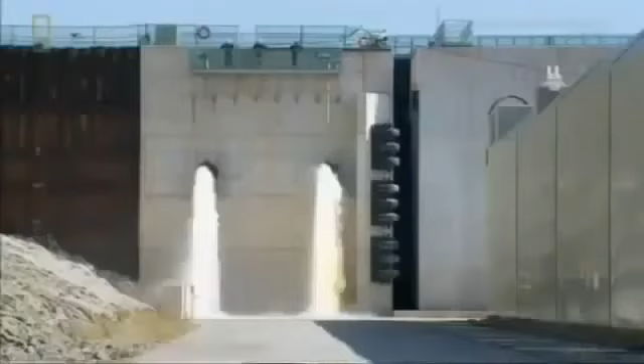Your next vacation may be spent in a paradise you've never heard of. You'll just need a way to get there. Here's the catch: that way has to go underwater. It would become the deepest immersed highway on Earth. Oh, they also have to build a couple of bridges. And did we mention the typhoons?

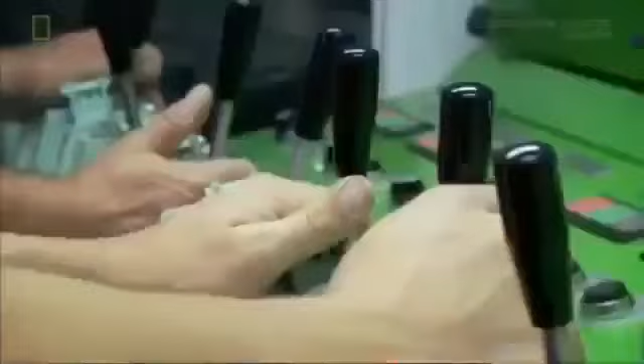These tugs are towing a contradiction: a tunnel segment that's both colossal and fragile. Come back, close. Slow down. A raft of techno breakthroughs and untested results.

Bound for a place few know, to entice the world to visit, and even sway the choice for the Olympic Games.

Busan is South Korea's second largest city, with 4.2 million people. Bigger than Madrid, closing in on Milan, and as hectic as Manhattan. South Korea is an Asian tiger, and Busan makes it roar.

Its skyline will soon include one of the world's tallest buildings. It's the nation's biggest port, and the 5th busiest in the world. Every 3 seconds, they unload a container. It's so busy, they had to build the sprawling Busan New Port. And still, Busan grows.

Busan is such a comer, it's bidding for the 2020 Summer Olympics.

But Busan has one big problem, and it's on display here at one of Asia's biggest fish markets. Dozens of vendors cram in here, 14 hours a day, every day of the year. And that's the trouble with Busan: it's so crowded, it's running out of room.

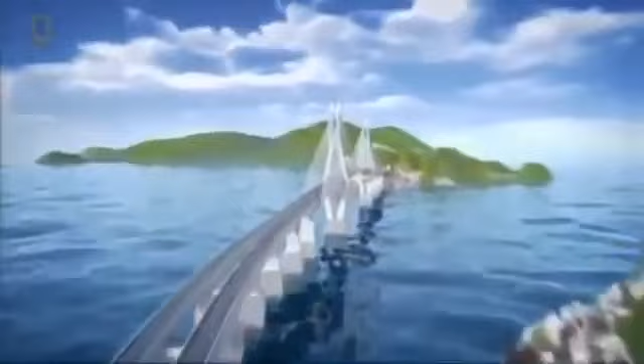The solution will slash travel time from nearly half a workday to 40 minutes and revolutionize life on both sides of the bay: the Busan-Geoje Fixed Link, a 4-lane highway that runs nearly 50 meters beneath the sea. Then it leaps across 2 colossal cable-stayed bridges, altogether longer than 80 football pitches — one of the biggest infrastructure projects in the world.

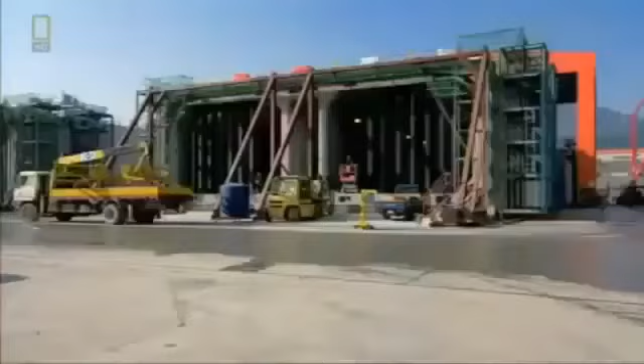Plunging 48 meters below sea level, the link will boast the deepest immersed roadway in the world. The tunnel will be composed of 18 mammoth segments, each as long as 2 football pitches and as heavy as an aircraft carrier, wide enough to carry 2 lanes of traffic each way, with an access tunnel between.

That's the concrete reality. Now, here's where it gets dicey. Each segment has to be carefully towed into position, then carefully sunk to the seabed. And all the segments have to align within 35 millimeters, less than a thumb's width.

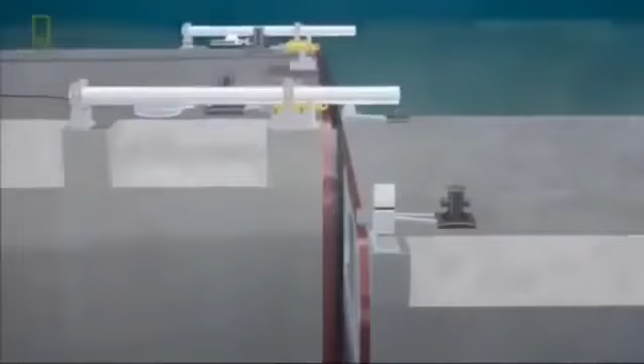Weather adds its own demands. This site is exposed to the open sea. There are always high waves, and the water is deep as well. It is wide open to the Northwest Pacific Ocean, so we have extreme exposure conditions for the construction period. So we've got to be ready for whatever that sends us, like big swell waves, strong winds, and even occasional typhoons.

Building a tunnel like none ever seen will take techniques like none ever tried. Yet the Koreans have never built an immersed tunnel. But this country has.

The Dutch have 5 centuries of experience at holding back the sea.

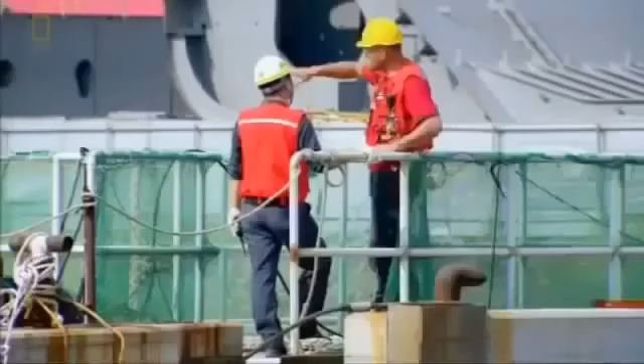21 years ago, Peter van Westendorp joined Strukton at the bottom and worked his way up. He's worked on 8 underwater tunnels.

There's just nothing better than immersing a tunnel. It's great to work with a relatively small group of people who are so focused on their job and put in 200%. That's just amazing.

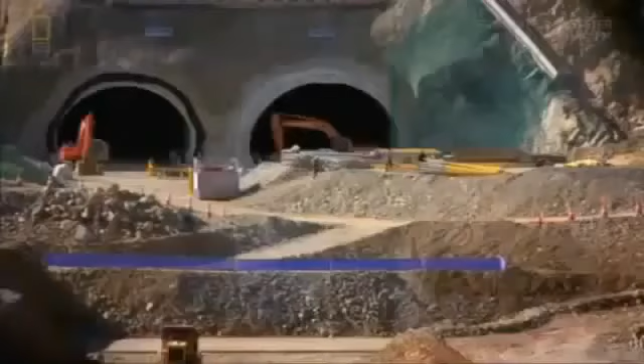Construction begins with the tunnel entrances, one on Gadeok Island, the other near an uninhabited island. From here, engineers will dig down to 12 meters below sea level to meet up with the undersea tunnel segments. But they won't tunnel through the seabed itself. If they did, the gradient would be too steep for driving. Instead, Peter's crew will lay prefabricated tunnel segments on the seabed.

First, engineers dredge a trench where the tunnel will rest. To buttress the foundation, they bore concrete columns into the seabed, stopping 3 meters shy of bedrock. The reason? Earthquakes. Avoiding bedrock will give the tunnel crucial flexibility. The segments will rest on a bed of gravel to ensure an even surface.

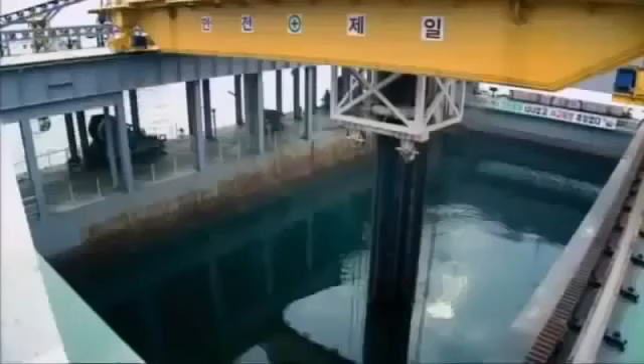Because the bed determines the exact height of each tunnel segment, the gravel must be placed with pinpoint accuracy. Later, the entire tunnel will be covered with thousands of tons of crushed rocks to protect it from collisions with ships or anchors.

Because the tunnel segments will be prefabricated, the first challenge is finding land for a construction yard. Not an easy task in Busan. If you look around, there's not a single metre of flat land anywhere that a contractor can use as a base for the construction period. From the tunnel site, the closest spot lies 35 kilometres away. It's big enough to build up to 5 tunnel segments at a time.

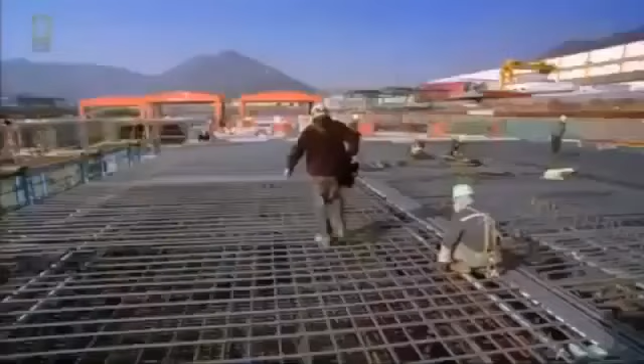Each segment weighs about 48,000 tonnes and is made of 8 subsections, each twice as long as a London bus.

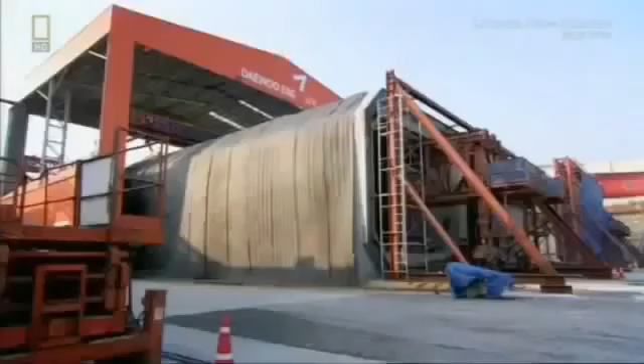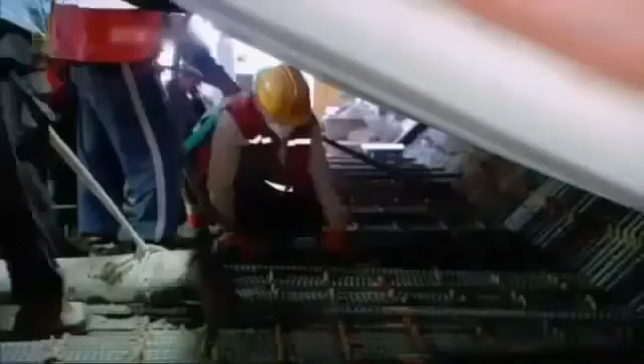Anyone with a basement knows water can penetrate concrete joints, potentially disastrous in an underwater tunnel. But each giant section is cast without a single joint, thanks to Korean ingenuity. We continuously poured full sections from the ground up to the top of the walls to eliminate gaps in the walls. A process lasting 24 hours.

After casting, the ends are sealed with steel bulkheads, a Dutch innovation best appreciated later on the bottom of Jinhae Bay. The bulkheads are watertight because these babies are about to take a bath.

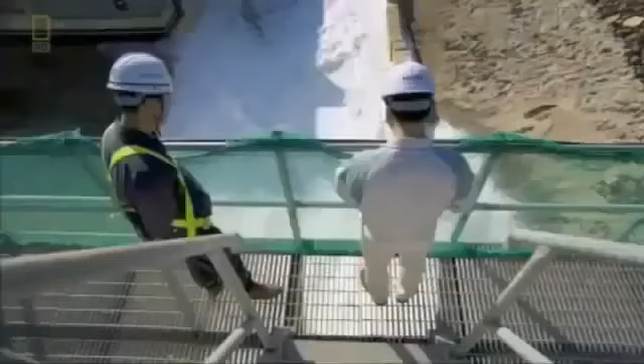Flooding the dry dock will allow them to float the segments out to sea. The inundation of the dock takes approximately 48 hours.

During the first phase, we let in water until it reaches the level of the bulkhead door. Then we'll check to see if the bulkheads are leaking. Once all the leaks are repaired, or if there are no leaks, we'll fill up the dock completely.

It's enough water to fill 230 Olympic pools.

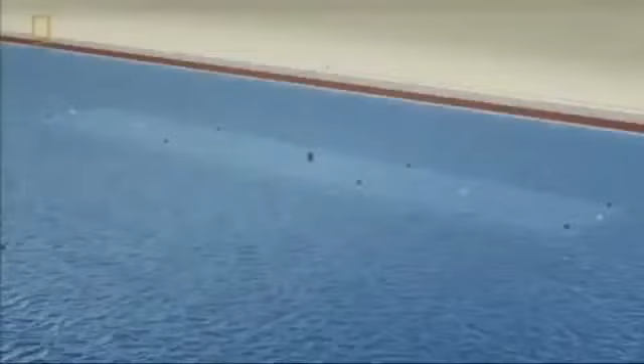So how do you prep 48,000 tons of dead weight to float? Inside every tunnel segment, there are 6 ballast tanks, and they're filled with water.

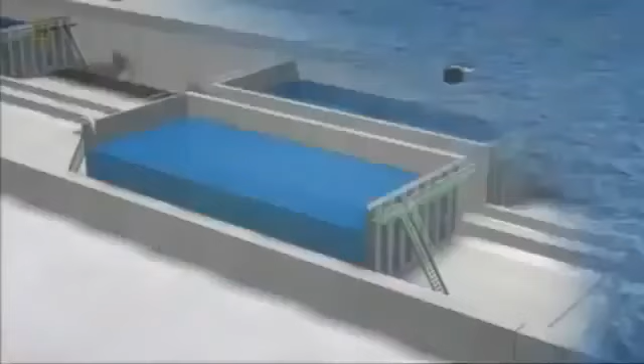To start the flotation process, we begin pumping out the water. We continue until the tunnel segment starts floating.

So what the tugboat has to do is to tow that slow. Then with the other winches at the backside, we control the tunnel element sideways direction. Now they can begin to warp out the segment.

Removing the first segment takes brawn and finesse to avoid colliding with the dry dock.

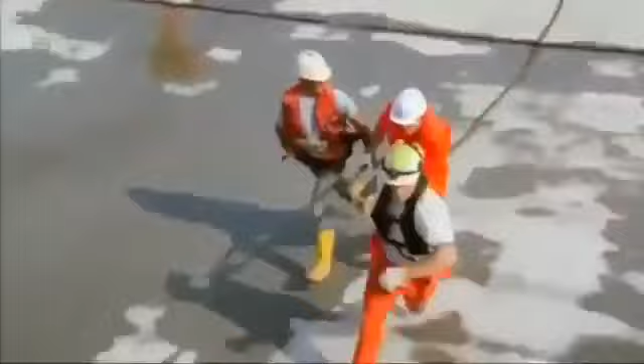With barely 2 meters on each side, there's no room for error.

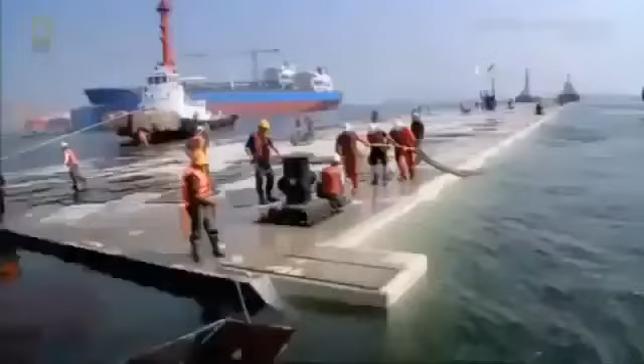While work continues on the undersea tunnel, the rest of the Busan-Geoje fixed link starts to rise: 2 giant bridges, one with 3 pylons, the other with 2.

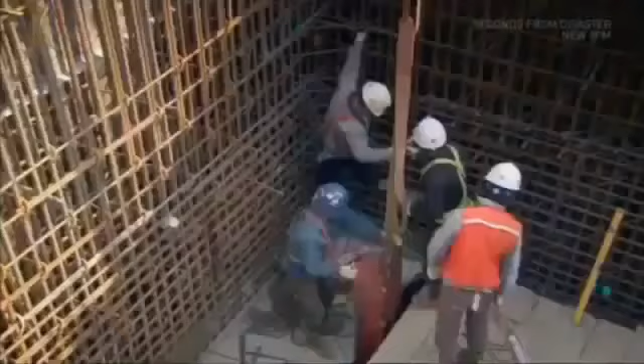At its topmost, the 2-pylon bridge will soar 156 meters above sea level, the height of a 50-story building. The span between the pylons will stretch the length of 5 football pitches, with enough room for the tallest freighters to pass under. Crucial for a city that thrives on shipping for its livelihood.

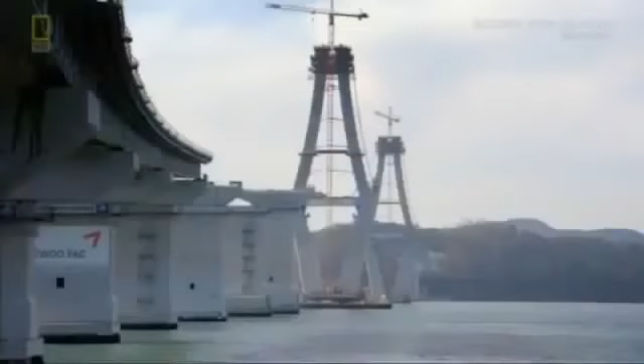The most pleasing aspect of the bridge is also the most daunting: its curved diamond shape. Of course, curved pylons are very difficult to construct, but they're very much in harmony with the surrounding scenery, in that they bear resemblance to a mother's praying hands and to the wings of seagulls.

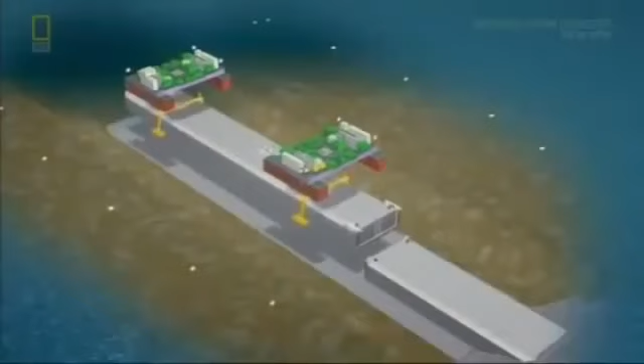35 kilometers away, the first 5 tunnel segments arrive at a temporary mooring site. From here, they'll travel across Jinhae Bay to their resting place on the sea floor, already leveled and lined with gravel. And here's how they'll get there: pontoons the size of a mansion, Dutch designed, Korean made. One pontoon is positioned near each end of the tunnel segment. After arrival at the tunnel site, mammoth winches on the pontoons will lower the segment to the seabed. At least, that's the theory, because it's never been done in the open sea.

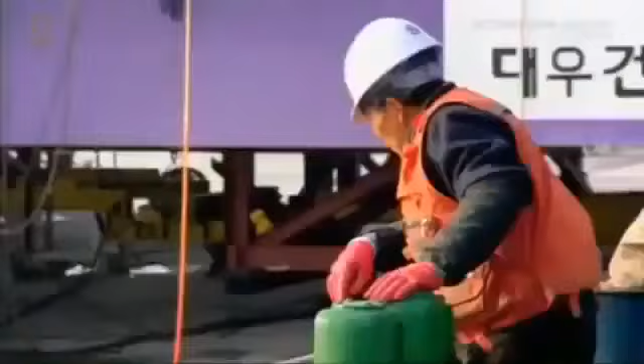A specialist diving team prepares the first tunnel segment for the immersion operation. Divers test connections for data systems and power supplies, standing by, and remove marine growth from the bulkhead.

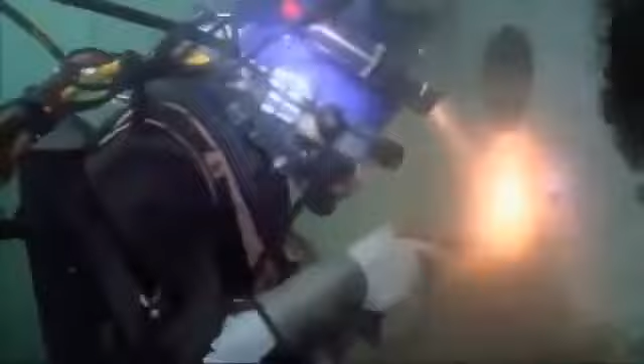Finally, they install steel wires underneath the tunnel segment, crucial for positioning during immersion. In a good position now, we can come up on the wire. Coming up on the wire.

Above water, the crew are also adding a temporary access tower, so workers can enter the segment in case of trouble with the ballast tanks. All clear, the tunnel is clear.

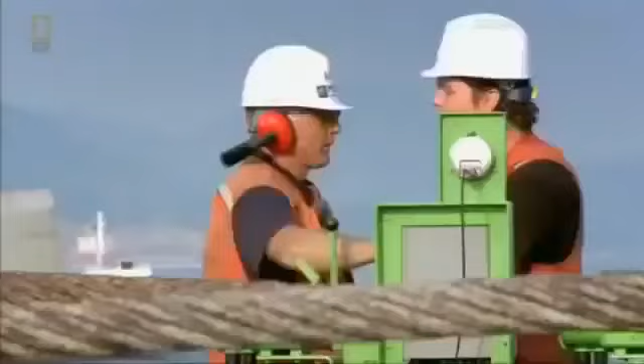Every problem has to be anticipated, because if things go south, they won't get a second chance. What we do doesn't have anything to do with luck. We know what's involved, we know how the process works, and we have the feeling we control the whole process. Not quite.

Back in Holland, the rest of the immersion team stands by to fly out. In all, 56 men wait for Peter to say go, and he's waiting for a forecast.

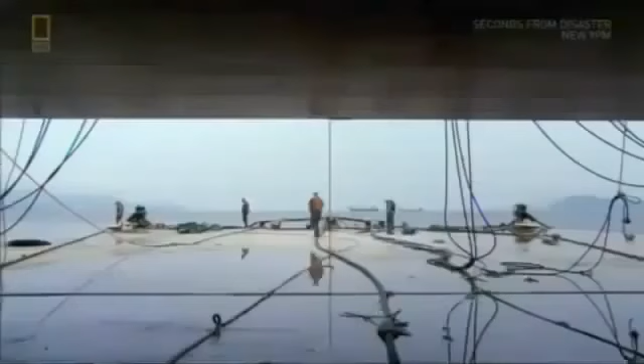When the wind blows from the south, swells roll in from the Pacific. Because we're situated offshore, we have to deal with waves, and these waves can be pretty fierce. Even swells barely 30 centimeters high pack so much force they could fracture the subsections that form the tunnel segment. Throughout its journey, the segment will be at the mercy of the waves, so the team needs 3 days of calm seas.

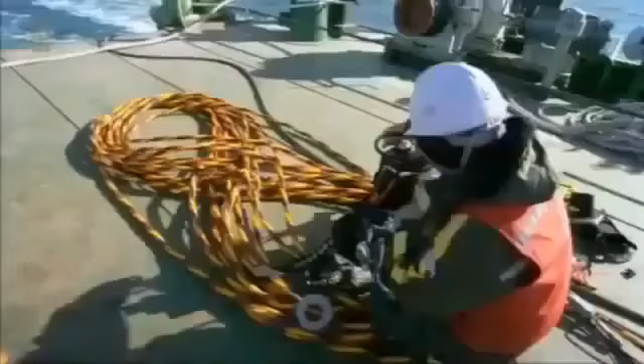Strukton looked around for a forecaster, but few dared to stick out their neck for such a costly guess. Then a Danish company seized the challenge. They came up with a model to predict waves as small as 10 centimeters up to 5 days out, a stunning breakthrough in forecasting. That means we're able to say, tomorrow we can do an immersion, and that means we're able to put people on the plane yesterday, really on a last-minute basis. It takes away a big risk for us and for our client.

We've got the weather, they're all showing the same prediction. The swell still not as bad. I would say we have a go. Green light. We'll try. Then we'll try, right? Okay, thank you, yes, bye-bye.

Ahead lie 48 hours of tension for the boss. Six months of work rides on steel threads and a forecaster's guess. Tonight, no one will sleep soundly.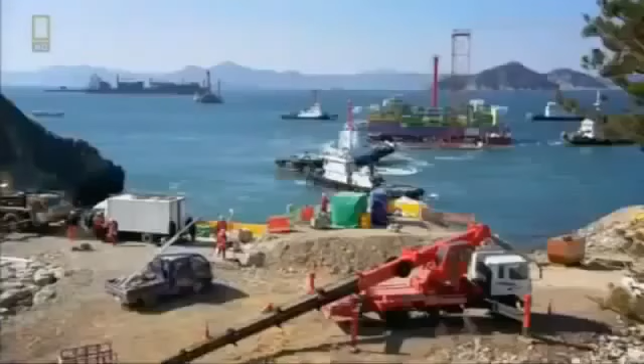After a cautious voyage at 3 kilometers an hour, the first tunnel segment arrives at Garduk Island, the starting point of the tunnel. Joining Peter is the elite team fresh from Holland, among the few men on the planet who can do this job.

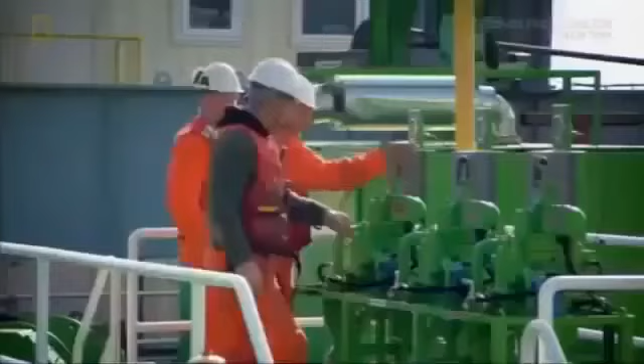But working along shore poses a huge challenge. 48,000 tons have to be maneuvered into a slot with just 1 meter of clearance underwater on each side. One false move and the segment could get jammed in the rocks. Controlling the segment are 14 steel cables, anchored in the rocks and on the seabed.

Aligning the segment takes painstaking accuracy. Surveyors take readings using a system of prisms and mirrors mounted on the access shaft and the survey tower. It's all new to the Koreans, so it takes time getting used to the technology. The ordeal will take all day and end either with an engineering triumph or a 48,000-ton disaster.

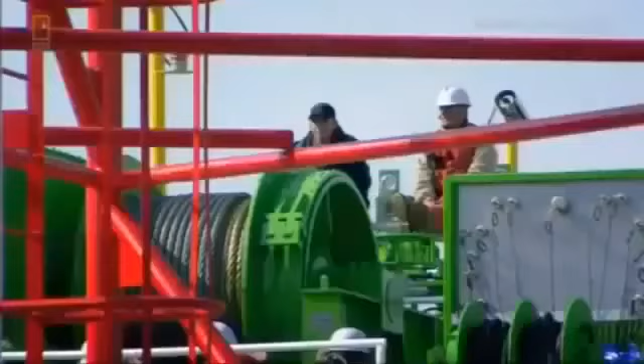With so little clearance and so much at stake, the segment moves at a snail's pace. After a journey of 35 kilometers, it's now just 4 meters from the abutment.

We've worked really hard for a half a year to prepare for this moment. 56 of our people are here to execute this operation. The Koreans are excited and tense because they've never witnessed this. We've done it more often, but still, a very special moment.

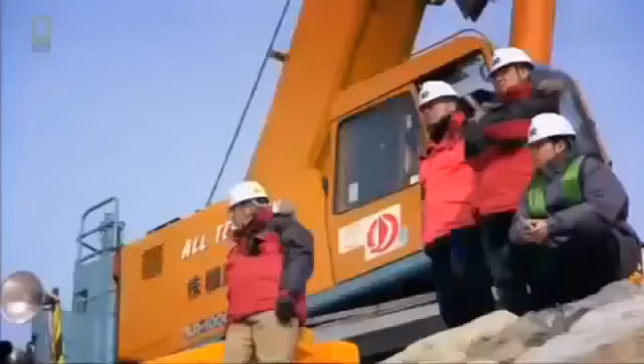Till now, steel plates have protected the leading edge of the segment. Easy down. Behind them is a component as crucial as it is fragile: a rubber gasket to ensure a watertight connection with the abutment.

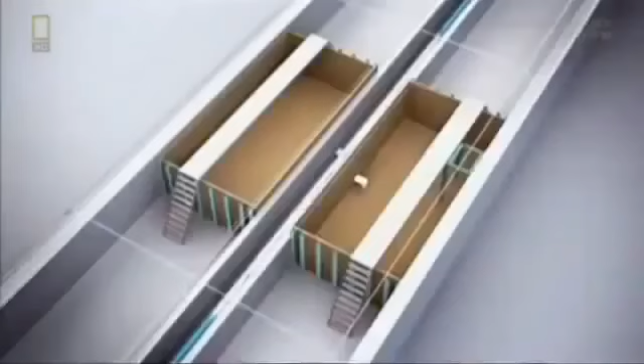Now they're ready to begin the descent. Operated by remote control, the ballast tanks slowly fill. The command post monitors everything via remote control cameras, on the pontoons and inside the tunnel segment.

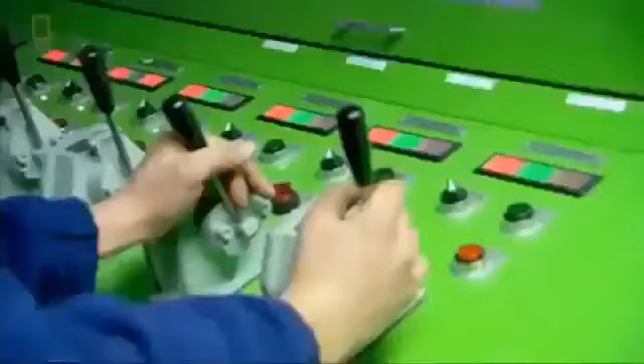The segment must align with the mouth of the tunnel to within 3.5 centimeters. You can imagine that if this segment were placed 10 centimeters off, and you did that 18 times, you'd end up 2 meters off on the other side. Well, that wouldn't be very good.

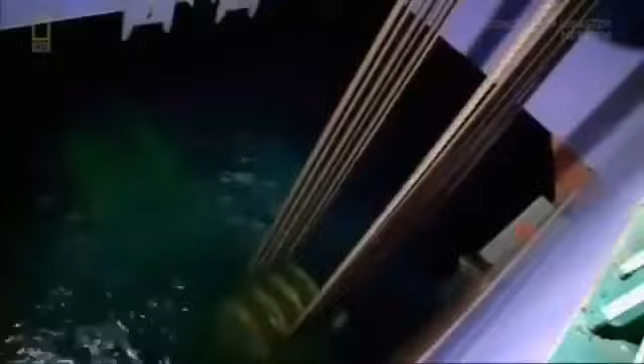Seven hours later, touchdown. The segment now rests just 50 centimeters from the abutment, the mouth of the landward tunnel. To close the gap, engineers have installed a pair of powerful hydraulic jacks. Linking the jacks and applying tension closes the gap.

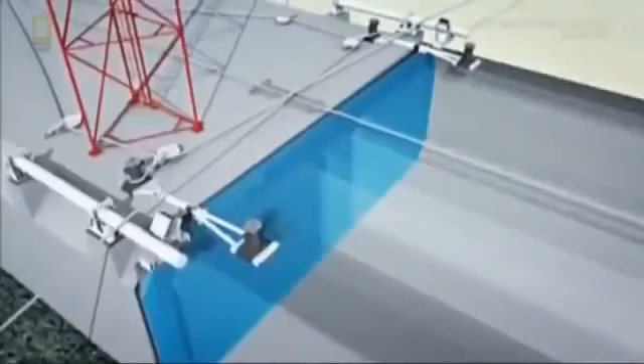The final stage begins from the landward side. A wall of water nearly 3 meters wide separates the segment from the abutment, what they call the immersion joint. Opening this valve will force the water out.

As the immersion joint empties, external pressure will further compress the gasket for a watertight seal. The echo from the bulkhead reveals the water level in the joint.

With the water drained, they can open the bulkhead door.

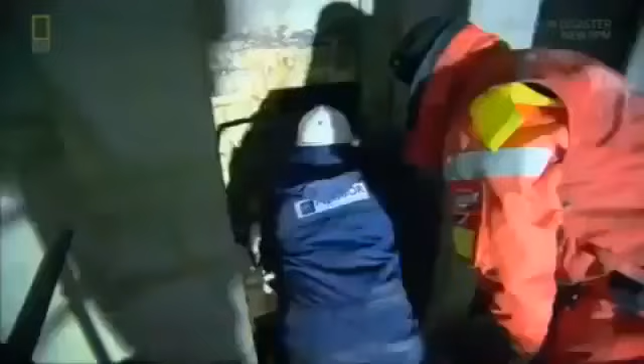But the lock's jammed. You know that he was going to break? Huh? Did you know that? Because you took the toolbox with you.

This calls for cruder technology.

All that stands between the crew and the first immersed segment is the steel wall installed back at the dock. And here is why it's so brilliantly simple.

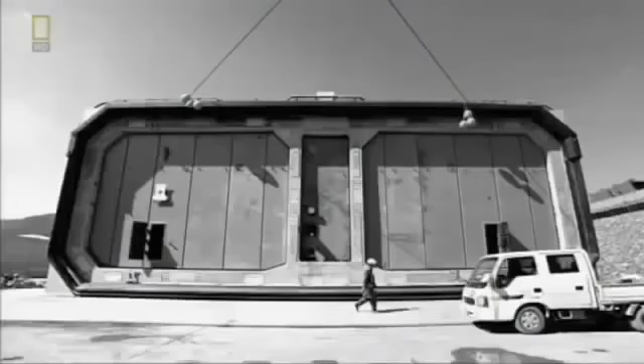On other tunnels, engineers seal the ends of segments with concrete, then knock it out after immersion. But that takes time and creates debris. The modular steel bulkheads are easy to install, easy to remove, and they'll be reused on every segment and eventually recycled. Faster, cheaper and safer. An engineering trifecta.

Finally, open sesame.

Although we experienced some unexpected things, we were very happy that it was completed successfully in the end. And the feeling of accomplishment was indescribable.

Their marathon operation lasted almost 78 hours. Some have gone 2 days without sleep. One down, 17 to go. And they won't all go smoothly.

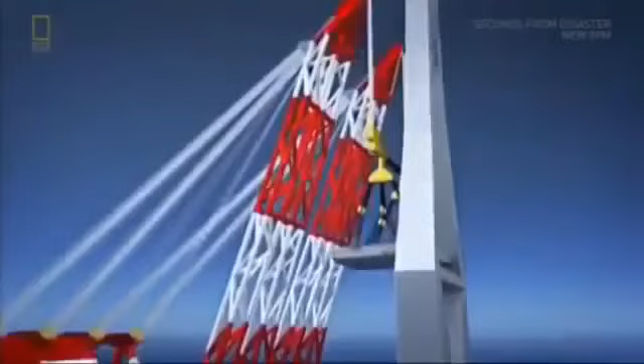Like the Busan Tunnel, the bridges advance in segments, but 2 at a time, not 1. It's called balanced cantilever construction. Working outward, steel segments are laid on each side of the pylon to keep the bridge in balance.

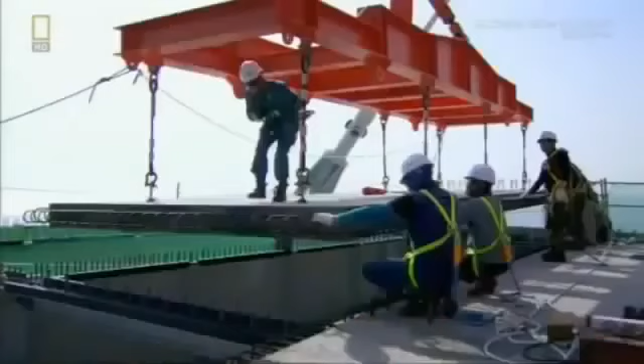Then 2 cables are attached to brace the segments. Once they've done that, the derrick crane then lifts up 6 precast concrete panels and places them onto the steel frame. Then put a final post-tensioning into the cables.

And we're ready then to start the whole thing over again.

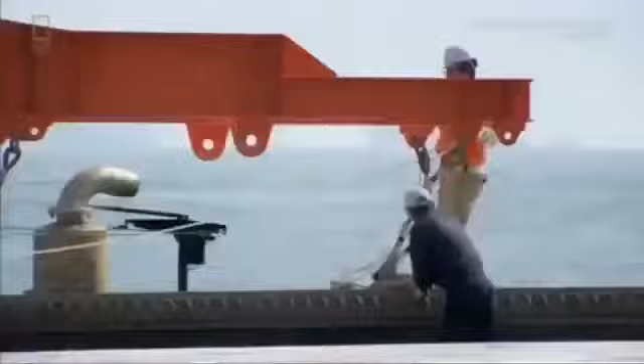Back at the tunnel, the team have installed 12 concrete segments. But now they're heading for 48 meters, the deepest water and the hardest challenge.

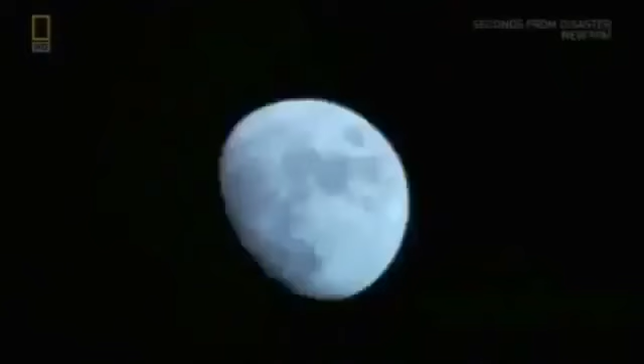The sea floor out here is soft clay, so they need to set anchors that can hold the segment and pontoons fast.

Stevmantas, named for their fish-like shape, they're designed to dig in where other anchors lose their grip.

Once segment 13 arrives here, 14 steel cables connected to the anchors will hold it in position. But once again, deep water raises the stakes.

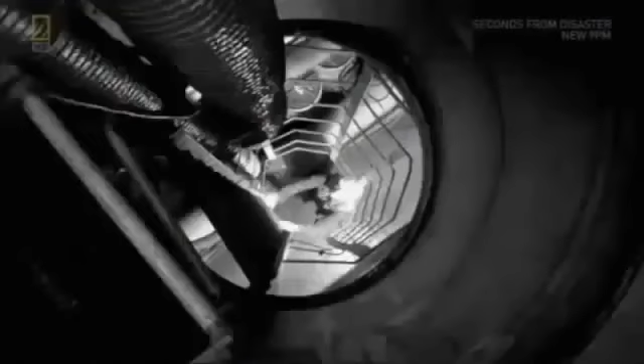Once the segment hits the bottom, suppose a problem arises with the ballast tanks. Somehow, Peter would need to get the engineers inside. On segment 1, they could use an access tower, but not in deep water.

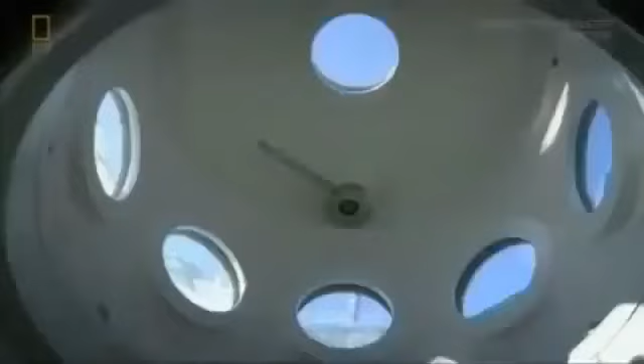The solution is a first in tunnel immersion: a self-propelled diving bell. Purchased in America, the sub was refitted just for this project.

With a little boat like this that can go to 300 meters, you've got the concept of a ferry transferring people to the tunnel segment. It's 9 meters long, with room for a pilot, co-pilot, and 5 engineers. It can dock on a landing tower on the segment for watertight access to the tunnel.

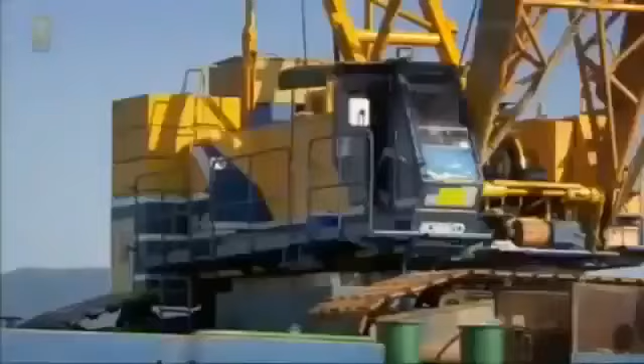Deep water poses another problem: monitoring the position of the segment as it's lowered, because one misalignment would be disastrous. To calibrate the position of the first segment, surveyors took readings from prisms mounted on the access tower. But remember, there's no access tower here. So once more, the Dutch devise a smart, simple solution. It's named for what it is.

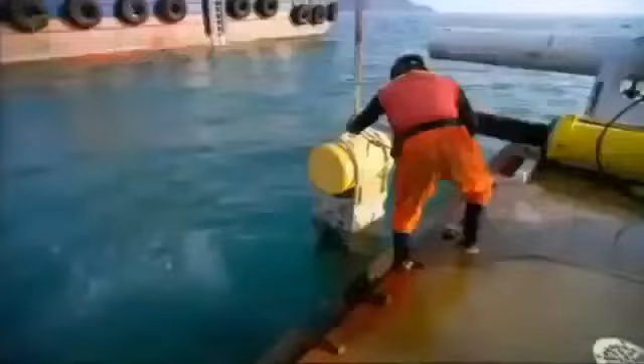A taut wire. One end attaches to the leading edge of the segment to be immersed. The other end attaches to the previous segment. The taut wire ensures the connection stays under high tension. Positioning the device is a delicate operation. This custom-made model is the only one in existence. Breaking it is not an option.

When this segment descends, a computer will record the length and angle of the wire, allowing the team to monitor the segment's position. The taut wire is now under high tension between this segment and the previous one. And as the segment descends, the wire automatically retracts and becomes shorter, so that provides us with exact positioning data.

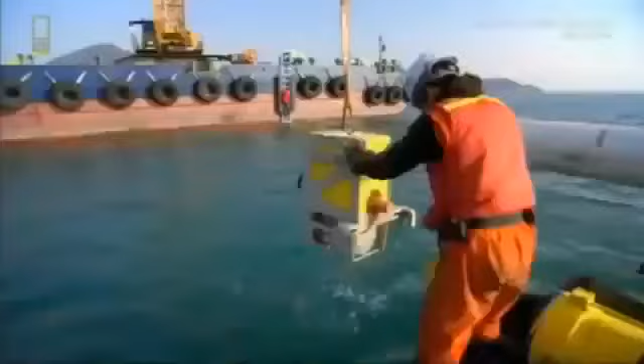To fine-tune the position of the segment on the seabed, 4 of these sensors are attached, one on each corner of the bulkhead. Another custom innovation for this project. And wait till you see how accurate they are.

The whole operation is remote controlled from the command unit on the pontoon. With one click, they start filling the ballast tanks. You can feel the tension building up now.

And then we all have one question: can we do it again? Can we get it in position? It's the same tunnel, but it's farther away from the coast. It's deeper, the weather, everything.

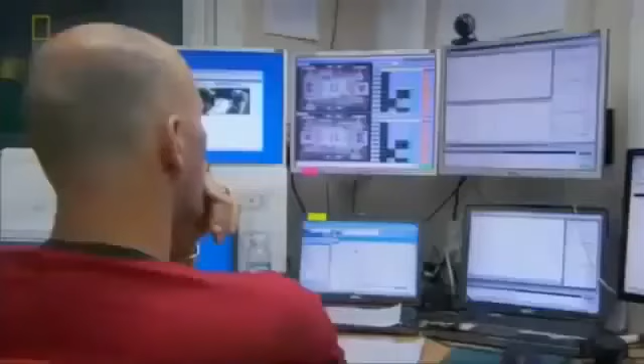So many aspects make it different every time, so you have to stay alert. All the data feeds into Peter's computer and refreshes the position of the segment every second. This is the tunnel where we have to go to. The green one is the final position, and this is where it is now. So you can see it's just below sea level.

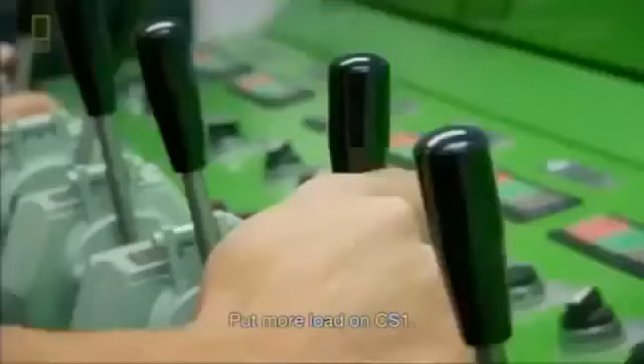Data from the winches allows him to adjust the segment during descent. It all happens like walking downstairs: one step forward, one step down. And the deeper it goes, the more careful the steps.

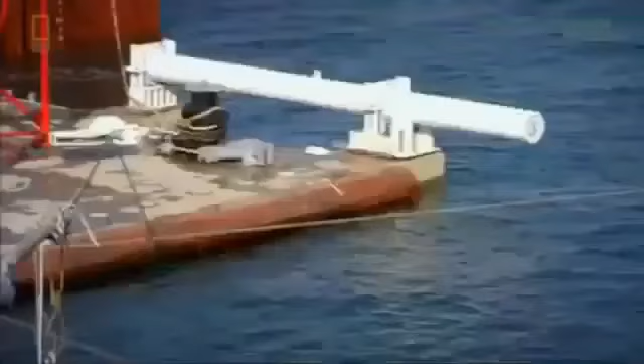The first step in joining the segments poses another challenge and another solution. The moment a tunnel segment approaches the one ahead of it, it's moving because of the swell. So we install 2 guide beams on the top end of the segment. Another simple but elegant solution.

The moment we pull them closer together, the guide beams become less flexible. The movement diminishes until the segment is motionless. With only 50 centimeters separating the segments, and in near zero visibility, a diver connects the hydraulic jacks.

The segments seem aligned, yet the slightest error on this end will translate into a big mistake at the other. But the Dutch don't miss a trick.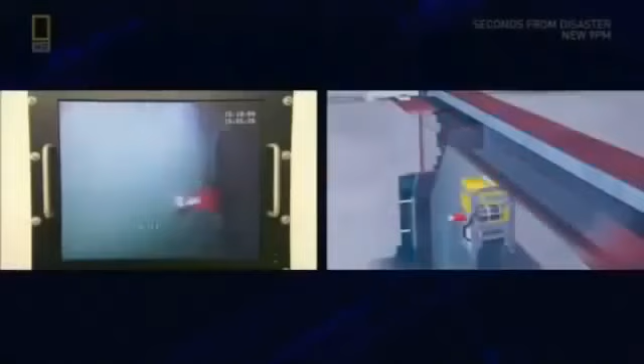The 4 remote-controlled sensors on the bulkhead now deploy. They measure the position of the segment within 1 millimeter, the width of a guitar string, and relay the data back to the command center.

Peter needs to shift 48,000 tons of concrete, 20 centimeters to the right. Even on calm days, the swell is so heavy and the segment is so long, stability is a problem.

The solution? The External Positioning System, or EPS. Yet another Dutch invention based on a simple idea: a pair of hydraulic legs and extendable feet to hold, lift and move the segment.

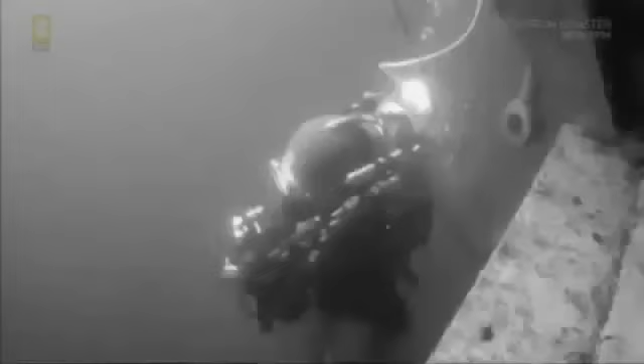Connecting each pair of legs are 4 steel cables, already installed back at the mooring site. Braced on its robot legs, the EPS laterally aligns the segment into its correct position. Now, the jacks are tightened by remote control, compressing the rubber gasket.

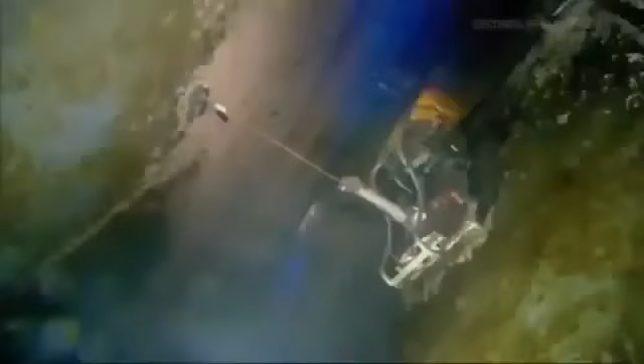Done, one more segment complete. Like the tunnel, the bridges approach the final stages.

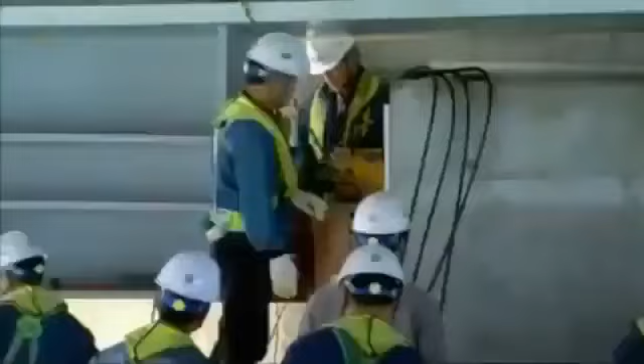Before the 2-pylon bridge can accept its last section, engineers have to perform a stretching exercise, as tiny as it is powerful. Both pylons have to be pulled back about 7 centimeters to create enough space for the key section to be placed. Once the tension is released, the final section will have a tight fit.

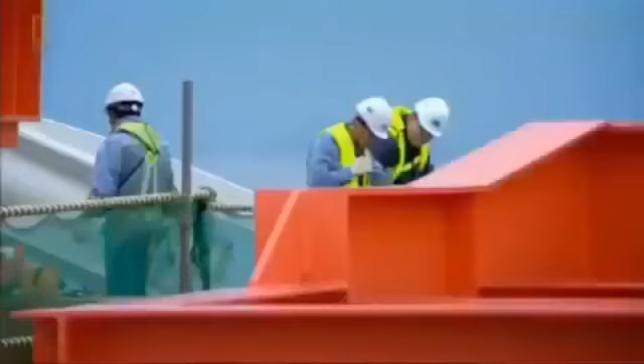After 6 years, they must be eager to finish. But just like the tunnel crew, they have to move in baby steps, because this baby is a giant.

A few kilometers away, Peter's crew prepares to install their last segment. Just like the first segment, number 18 has to be maneuvered between rocks. As before, they run some of the anchor lines from the pontoons to the rocks.

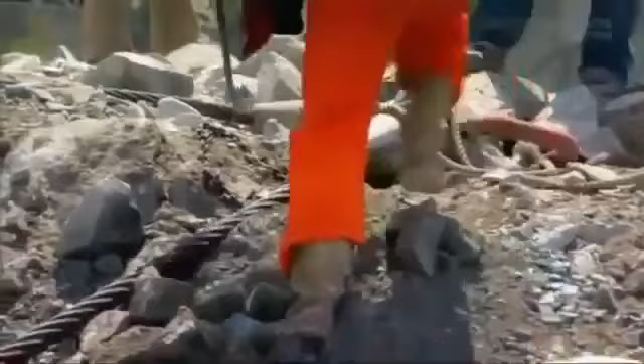Because it's so close to the island, it's very difficult to install the immersion wires. Connecting them isn't easy by any means—it's not just a matter of simply pulling them in place. With all cables attached, they can start maneuvering the segment into place.

Because this segment is extremely heavy, we can't afford even a small mistake. Light contact can cause huge damage to the segment, and that kind of damage can set back the entire project. After 3 years, they'll open the last tunnel segment tonight, if all goes well.

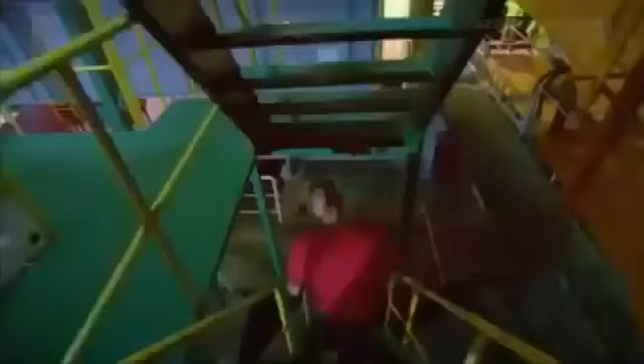The segment hits the bottom, but there's trouble. One end is sitting 28 centimeters too high. We're now trying to figure out what the cause is. We don't know yet—it's a major problem at the moment.

We're taking about half an hour to go through all the steps so that we don't miss anything, and then I'll inform you about the situation.

The gravel foundation under one of the EPS feet is overbuilt, so they'll have to remove the foot. And the grand opening will have to wait one more day.

After final adjustments, the last tunnel segment now sits squarely on the sea floor. All that's left is entering the tunnel to seal the joint with the final segment. They'll enter via the tunnel entrance on Gadeok Island. It's the last time Peter will make this trip.

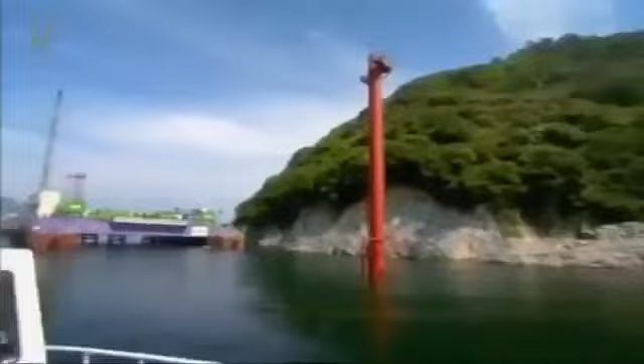You start something 3 years ago, and the first time you think, gee, still so many to go. But time flies—now it's the last one. That feels kind of strange. Mixed feelings. Glad it's almost finished, but it's a pity we can't do one more. We're approaching that moment again—it's at the bottom, opening the door, hoping it'll all be okay.

After 3 years, light at the end of the tunnel.

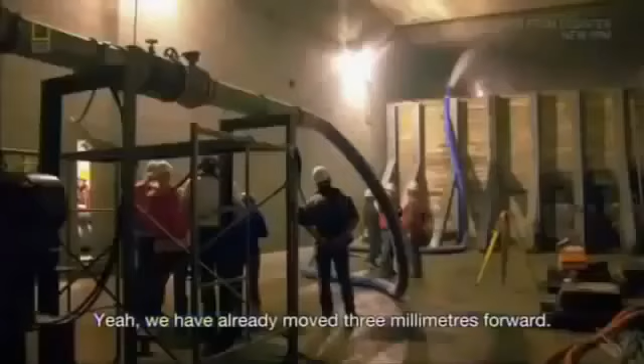They always celebrate this step, but today is the grand finale. Once complete strangers, now firm friends, and soon to go their own way. The end of their long journey lies behind this bulkhead door, and the honor of opening it falls to Peter.

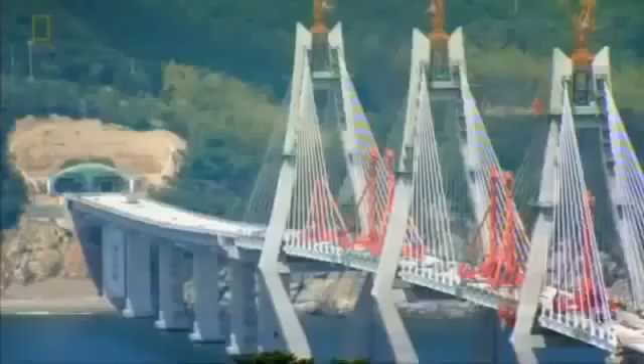Back at the bridge, the final section is lifted into place. Once the tension on the towers is released, the whole structure will be locked in place.

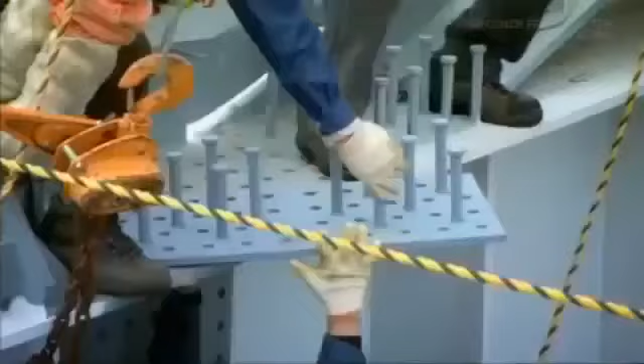With the bridge complete, all that remains is opening the final segment of the tunnel. Last inspection.

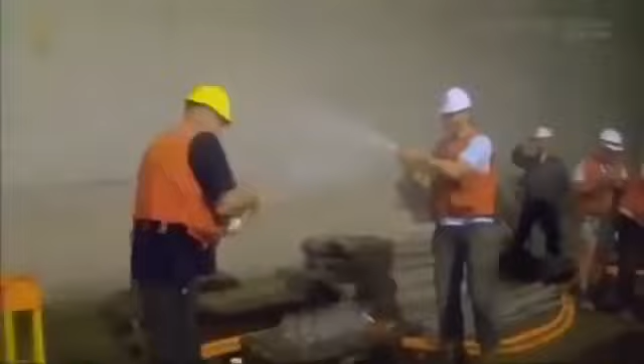Really extremely proud that we did it, and happy, of course. Happy for the whole team. It's just great—after all this time and after a difficult operation, we did it.

Very emotional, yes. Fits the moment. I'm proud—so proud, yeah.